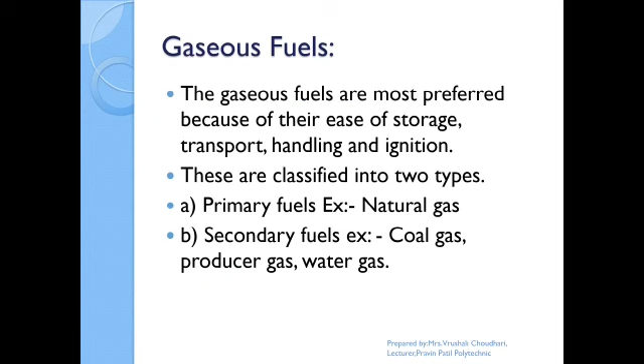The first fuel is natural gas. It is obtained from the wells dug in the earth during the mining of petroleum. It is mainly composed of methane and small quantities of ethane along with other hydrocarbons. If lower hydrocarbons are present, the gas is called dry gas or lean gas. But if hydrocarbons having higher molecules are present, the gas is known as rich or wet gas.

The average composition of natural gas is as follows. It is naturally occurring, so its content or composition varies as per the source: methane, ethane, propane and butane. Methane is the major component of natural gas, about 88.5% present. Ethane 5.5%, propane 3.7%, butane 1.8%. Other gases and impurities are 0.5%.

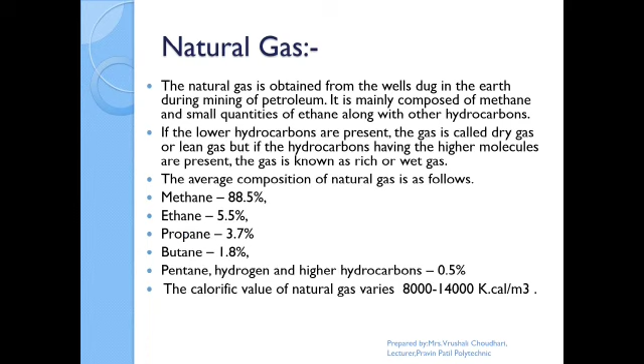The calorific value of natural gas varies from 8,000 to 14,000 kilocalorie per meter cube. Again, the calorific value changes as per the source and composition of natural gas. What is calorific value? The amount of energy produced by burning of 1 meter cube of a gas or fuel is called calorific value. It may be 8,000 kilocalorie or up to 14,000 kilocalorie produced by burning of gas. Where are we using this natural gas?

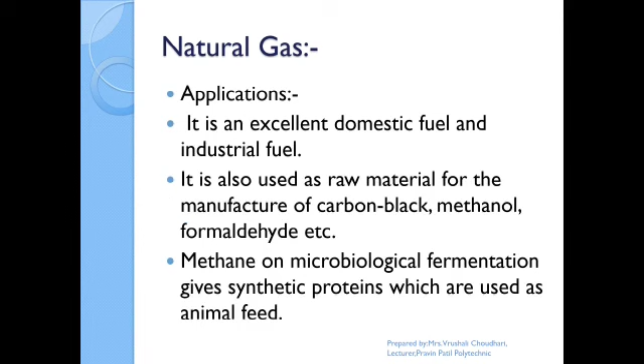Natural gas is also commercially called CNG, compressed natural gas. It is used as a domestic fuel as well as an industrial fuel. It is also used as a raw material for manufacturing carbon black, methanol and formaldehyde. Methane, on microbiological fermentation, gives a synthetic protein which is used as animal feed.

The next most used gaseous fuel is liquefied petroleum gas. Whatever we use at our home for cooking purpose, that is LPG, liquefied petroleum gas. This gas is not naturally occurring. We obtain LPG by fractional distillation of petroleum. This gas is obtained from natural gases or as a byproduct of refineries during cracking of heavy petroleum products. The main components of LPG are N-butane, isobutane, butylenes and propane.

These hydrocarbons are in a gaseous state at room temperature and 1 atmospheric pressure, but can be liquefied under high pressure. This gas is gaseous at room temperature, but for easy convenience in traveling or transportation, we convert it into liquefied form under high pressure. We keep LPG in a metallic cylinder attached with a burner through a pipe.

It has a special odor due to the presence of organic sulfide, which is added specially for safety measures. In general, LPG, liquefied petroleum gas, is odorless - there is no smell or odor. But to identify if there is a leakage or not, we specifically add organic sulfides. So due to that, LPG has a particular sulfur smell, which is required for safety measures.

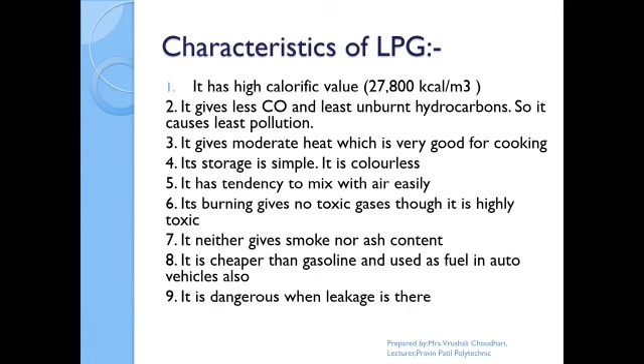It gives moderate heat which is very good for cooking. Its storage is simple. It is colorless. It has a tendency to mix with air easily. After burning, it does not give any toxic gases. It neither gives smoke nor ash. It is cheaper than gasoline and is used as a fuel in auto vehicles also. It is dangerous when there is a leakage. Therefore, to identify leakage, we add sulfur components.

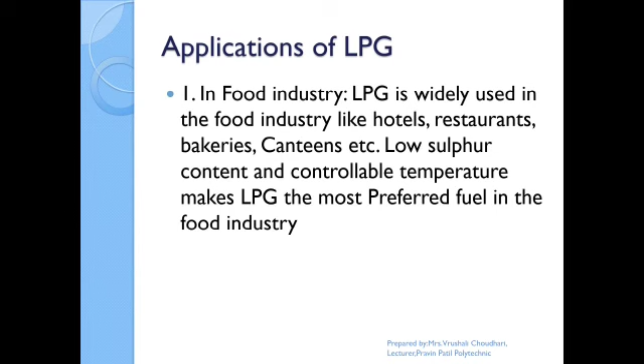Application of LPG: in the food industry, LPG is widely used in households, hotels, restaurants, bakeries, canteens. It is a good source of energy with very high calorific value, low sulfur content and controllable temperature, meaning it is easily controlled when the fuel is LPG. If there is coal or wood, controlling the flame is difficult, but when we talk about gaseous flame, it can be easily controlled. Therefore it is preferred over other fuels in industry. It is also used in the glass and ceramic industry.

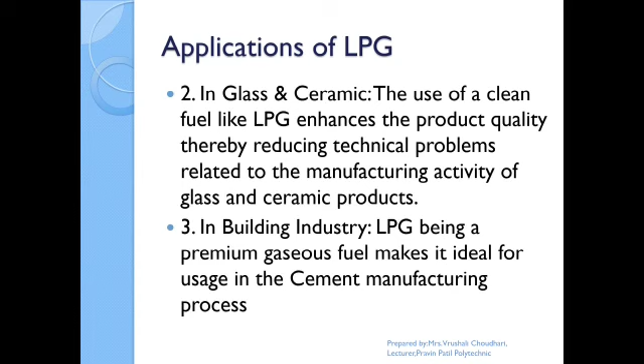The use of clean fuel like LPG increases the product quality, therefore reducing technical problems related to the manufacturing activity of glass and ceramic products. As it is colorless, it does not produce any manufacturing problem. In the building industry, it is also used for the cement manufacturing process.

In the automotive industry, the main advantages of using LPG are that it is free from lead, has very low content of sulfur and other metals, and does not cause pollution. But as it has a lower ignition temperature, it is more dangerous.

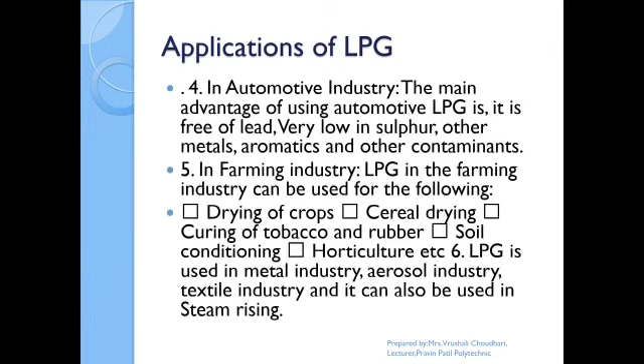In farming, it is used for drying crops, cereal drying, tobacco and rubber making, soil conditioning, and horticulture. It is also used in the metal industry, aerosol industry, textile industry, and for steam raising.

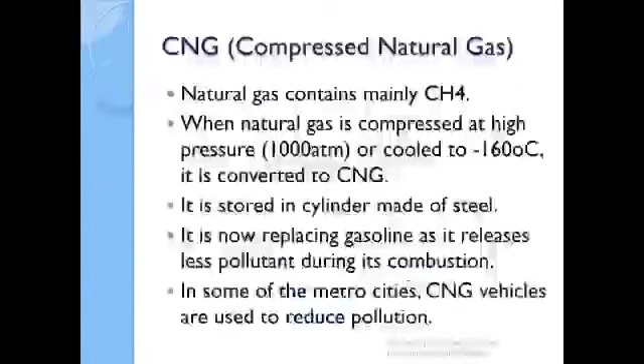Another gas is CNG, compressed natural gas, whose main component is CH4. It is stored in steel cylinders, replaces gasoline, releases less pollution, and is used for vehicles in metro cities. It is eco-friendly and can be used in both petrol and diesel vehicles.

It is lead and sulfur free, and can be used to reduce harmful engine emissions. It is lighter than air, so it will rise above ground level and disperse into the atmosphere even in case of leakage, making it less dangerous. It is also colorless.

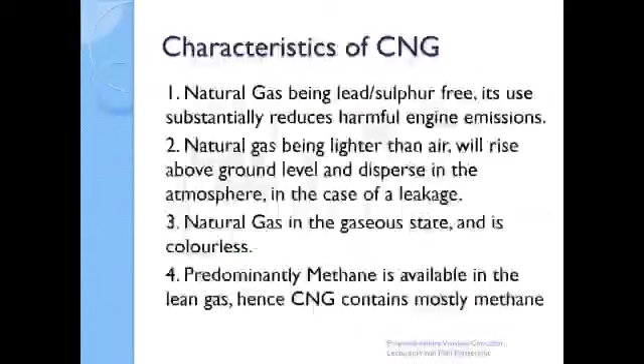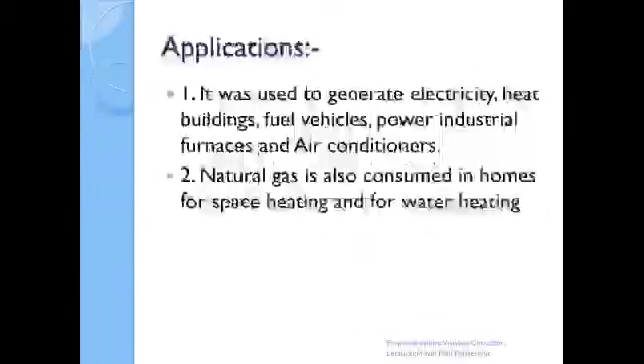It is used to generate electricity, heat buildings, fuel vehicles, power industrial furnaces and air conditioners. It is also consumed in homes for space heating and water heating, used in stoves, ovens, clothes dryers and other applications, and used in vehicles in metro cities to reduce pollution.

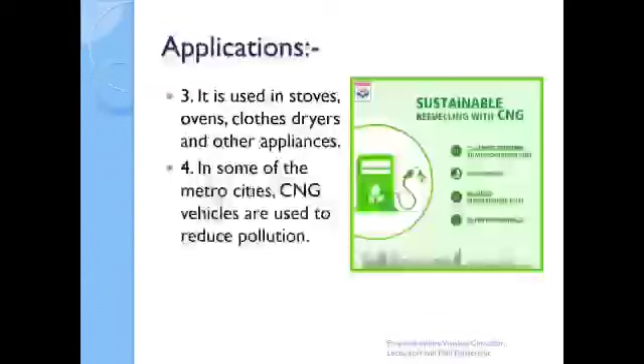Biogas - everybody knows what biogas is? Yes, it is produced by the degradation of biological matter by the action of anaerobic bacteria in the absence of free oxygen. When organic matter or organic waste is degraded by anaerobic bacteria in the absence of free oxygen, they produce a gas called biogas.

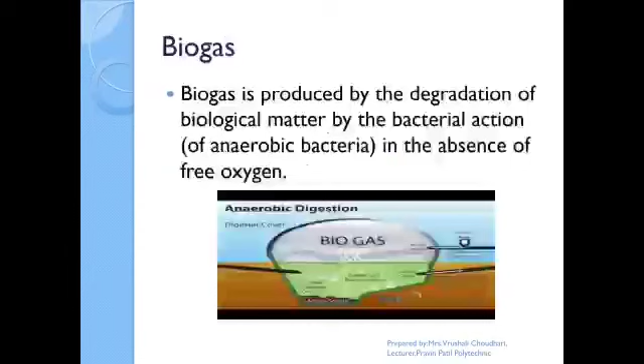This is a biodigester. In this, we are putting manure, household waste, human waste, etc. We put all waste material here, and we do not allow oxygen to contact this waste. Anaerobic bacteria are present, which live without the presence of oxygen, and they convert the manure or waste material into gas, which gives a lot of energy.

Natural gas is a biogas which results after a long period of decay of animal and vegetable matter buried inside the earth. Gobar gas, also called dung gas, is produced by the anaerobic fermentation of cattle dung. Biogas can also be produced from sewage waste and other organic waste.

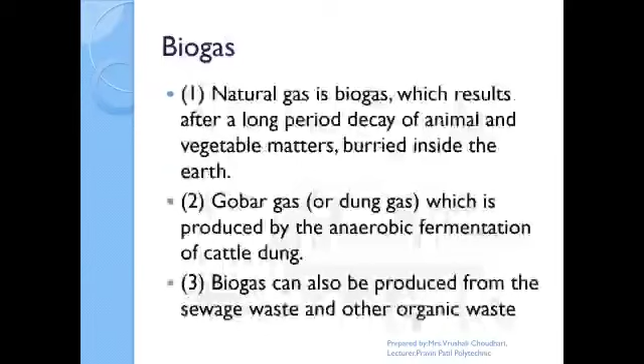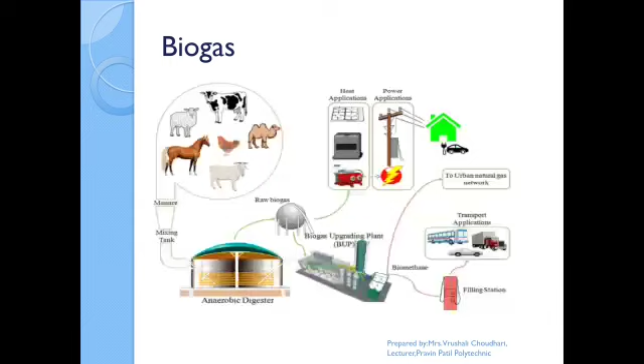So what is required for biogas? We require organic waste in a manure mixing tank, which we put into an anaerobic digester. There, anaerobic bacteria undergo digestion and produce biogas, which is used for heating appliances, for cooking food, for power applications, as well as for transport machines.

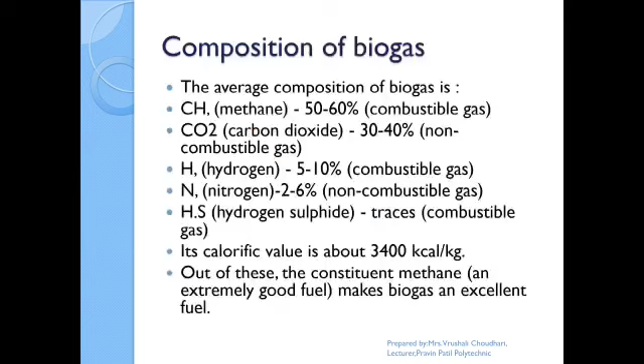Composition of biogas: the average composition is methane 50 to 60%, carbon dioxide 30 to 40%, hydrogen 5 to 10%, nitrogen 2 to 6%, and hydrogen sulfide in a very trace amount. Its calorific value is 3400 kilocalories per kg. Out of these constituents, methane is a very good combustible gas that produces lots of energy, making biogas an excellent fuel.

Properties after burning of biogas: it liberates a larger amount of heat than that obtained by burning animal dung or firewood directly. Biogas burns without producing any residue or ash. The waste produced during the manufacturing of the gas is used as an excellent manure, used in farming as a fertilizer. It does not produce any pollution to the atmosphere.

It is cheap, clean, has a high calorific value, and is convenient fuel. It involves no storage problem since it can be supplied through pipes directly from the biogas plant. It is a very economical gaseous fuel.

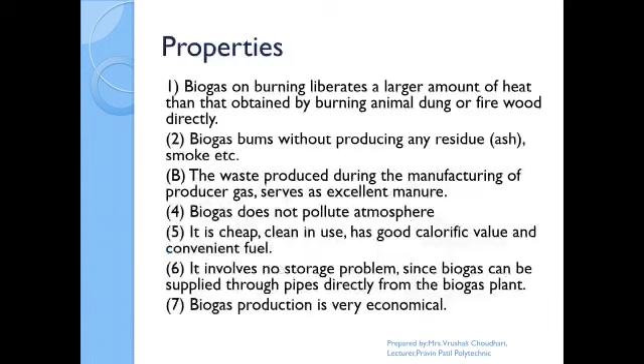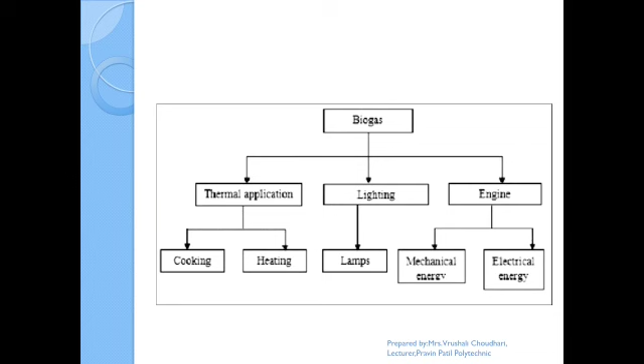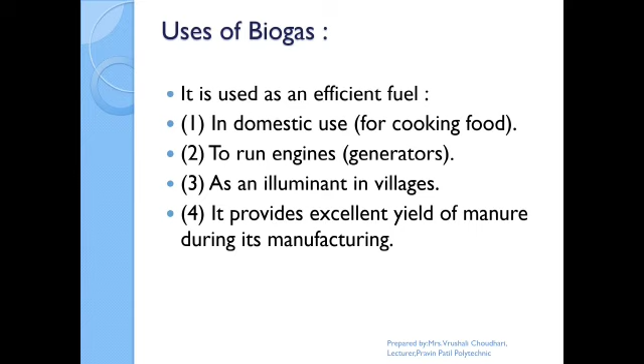It is used for cooking, heating, lighting purposes, and for producing mechanical energy as well as electrical energy. It is an efficient fuel for cooking, for running engines and generators, and for making street lights in villages. In a village, it also provides an excellent yield of manure during its manufacturing, which is used as fertilizer, very good for the soil.